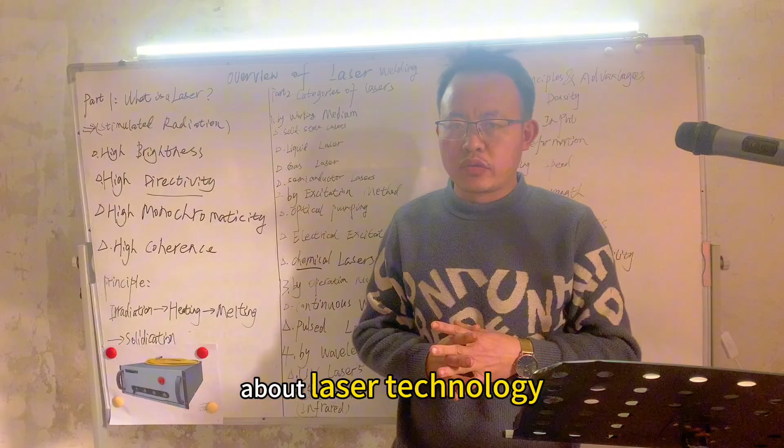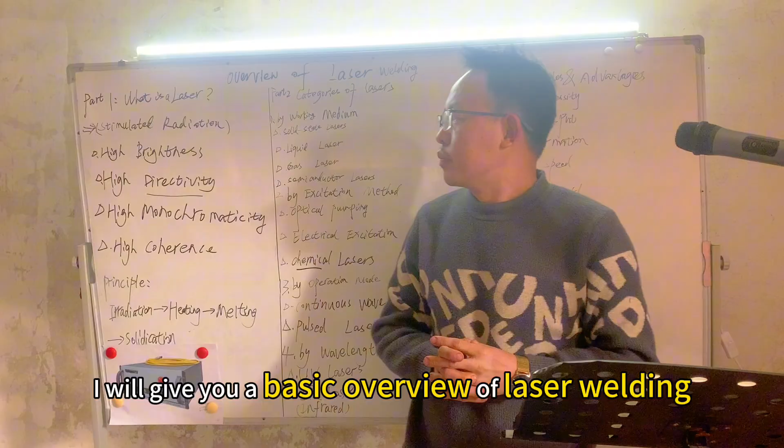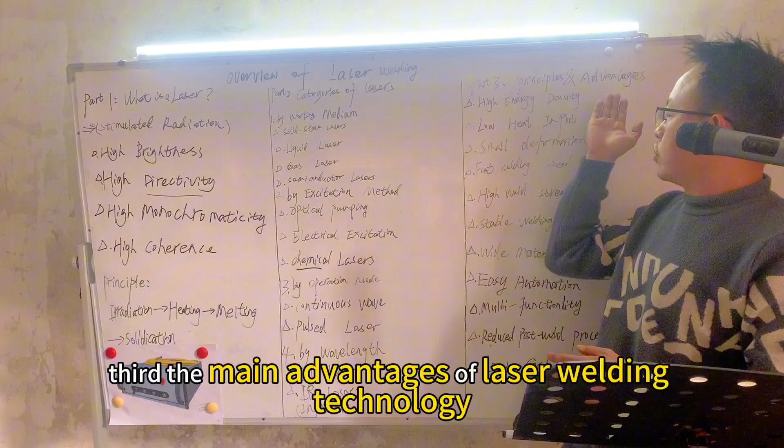Today, we are going to talk about laser welding, which is an important technology in modern manufacturing. In this video, I will give you a basic overview of laser welding. We will cover three main topics. First, what a laser is. Second, the basic principle of laser welding. Third, the main advantages of laser welding technology. I will also write some keywords on the whiteboard so that it is easier to follow.

Alright, let's begin. Number 1. What is a laser? First, let's talk about what a laser is. A laser is a kind of coherent light generated by stimulated emission of radiation. Compared with ordinary light, laser light has several special properties. There are 4 important characteristics. The first is high brightness. Laser light concentrates a very large amount of energy into a very small spot.

The second is high directivity. This means the laser beam travels in a very straight and focused direction. The third is high monochromaticity. This means the laser light has almost a single wavelength. The fourth characteristic is high coherence. In other words, the light waves move together in the same phase.

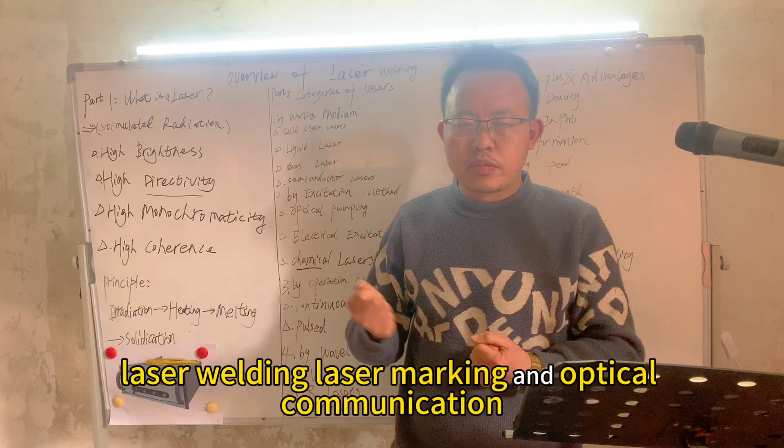Because of these properties, the energy density of a laser beam can reach more than 10 million watts per square centimeter. This extremely high energy density allows lasers to be widely used in many fields such as laser cutting, laser welding, laser marking, and optical communication. A laser device is a machine that generates and amplifies this laser beam. Lasers can also be classified in several ways, for example by working medium, excitation method, operation mode, and wavelength.

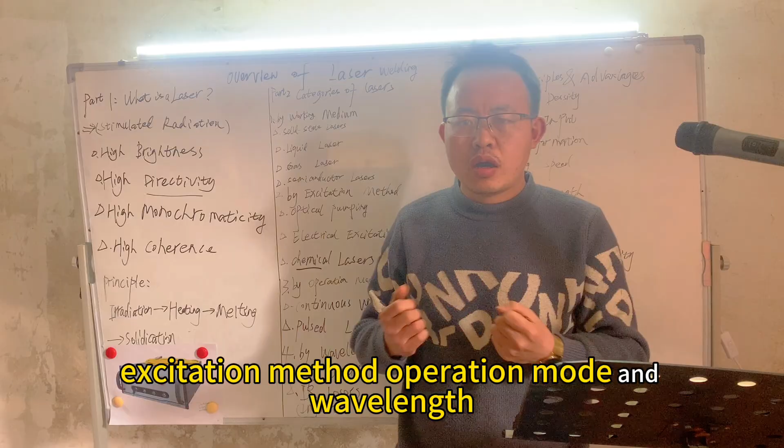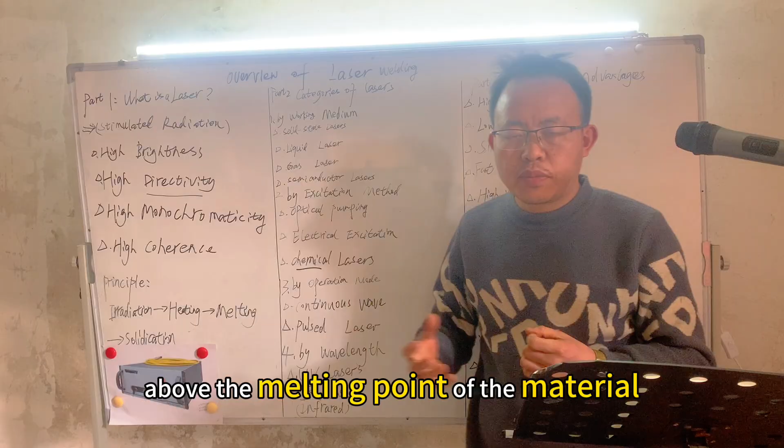Now, number 3, basic principle of laser welding. Now let's look at the basic principle of laser welding. Laser welding is a material joining process that uses a high-energy laser beam as the heat source. When the laser beam is focused onto the surface of the workpiece, the material absorbs the laser energy and heats up rapidly. The temperature quickly rises above the melting point of the material, forming a small molten pool.

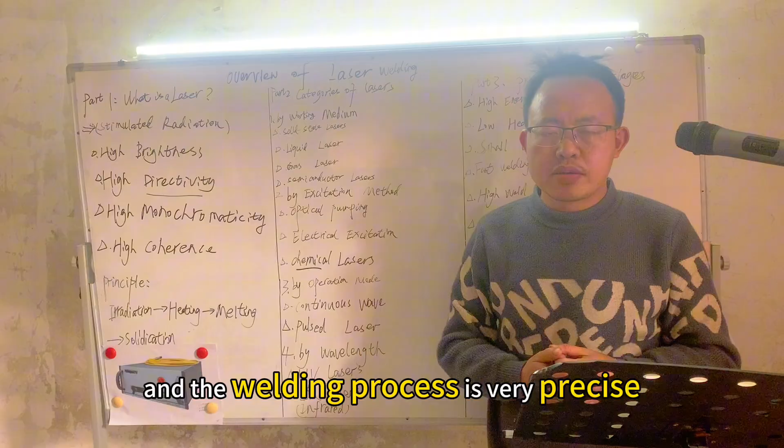As the laser beam moves forward, the molten metal solidifies and forms a weld seam, which joins the materials together. Because the laser beam is highly concentrated, the heating area is very small and the welding process is very precise. Today, laser welding technology is widely used in many industries, such as automobile manufacturing, rail transportation, aerospace, shipbuilding, petrochemical industry, and modern equipment manufacturing.

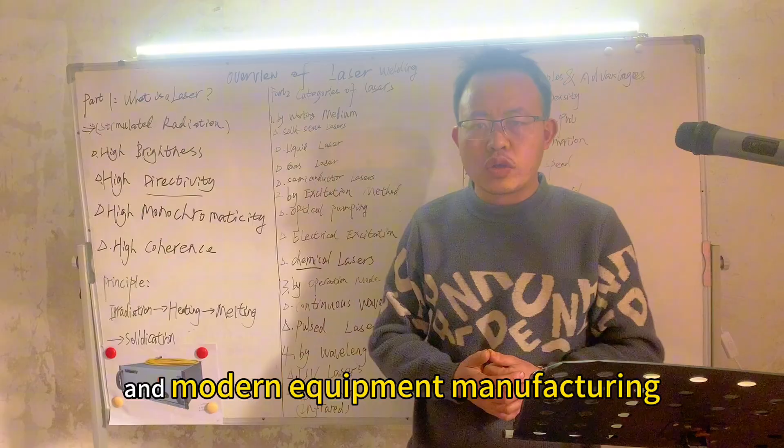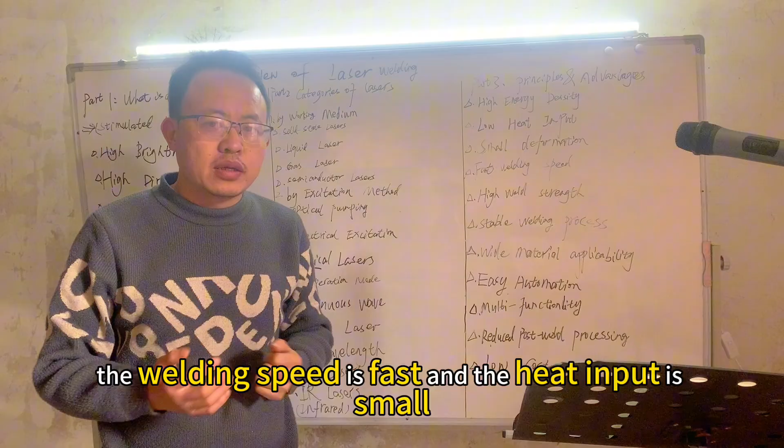Number 4, advantages of laser welding. Now let's talk about the advantages of laser welding. Laser welding has developed very quickly in recent years because it offers many unique benefits. Here are 11 key advantages. Advantage 1, high energy density. Laser welding has very high energy density and strong penetration ability. The welding speed is fast and the heat input is small. Therefore, the heat affected zone is small and the deformation of the workpiece is minimal.

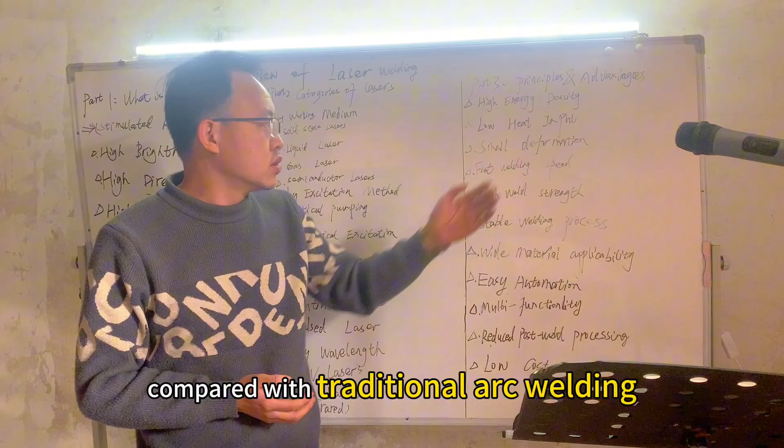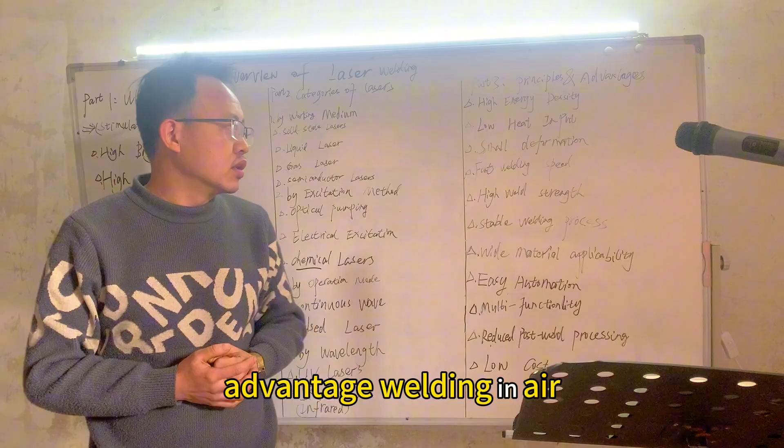Advantage 2. Stable welding process. Compared with traditional arc welding, the laser beam is very stable. The welding parameters are easier to control, which results in good repeatability and consistent weld quality. Advantage 3. Welding in air. Unlike electron beam welding, laser welding does not require a vacuum environment. It can be performed directly in air and is not affected by electromagnetic interference. This makes the process simpler and more practical for industrial production.

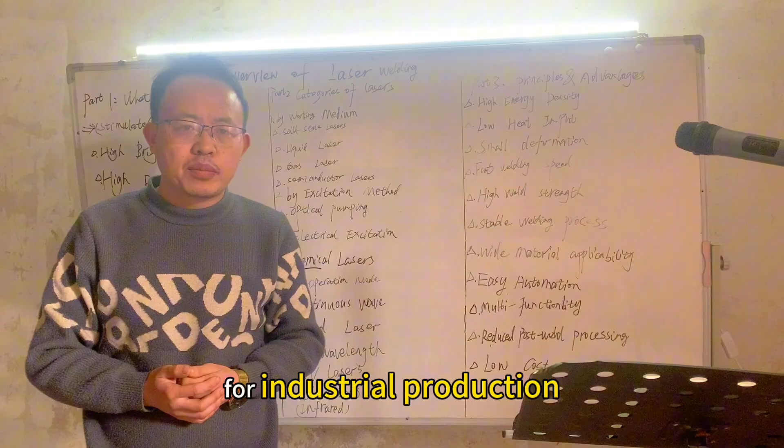Advantage 4. High welding quality. Laser weld seams are usually narrow and clean, with good surface quality. In many cases, the strength of the weld seam can even be higher than the base material. Advantage 5. High efficiency and low noise. Laser welding is usually much faster than traditional welding methods. It also produces very little noise, which improves the working environment.

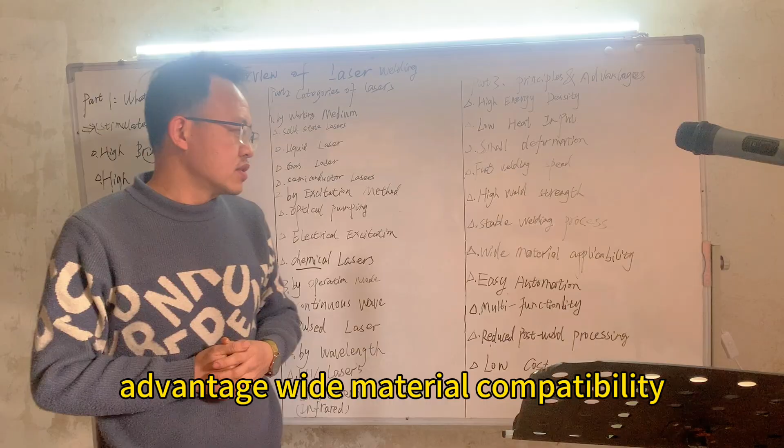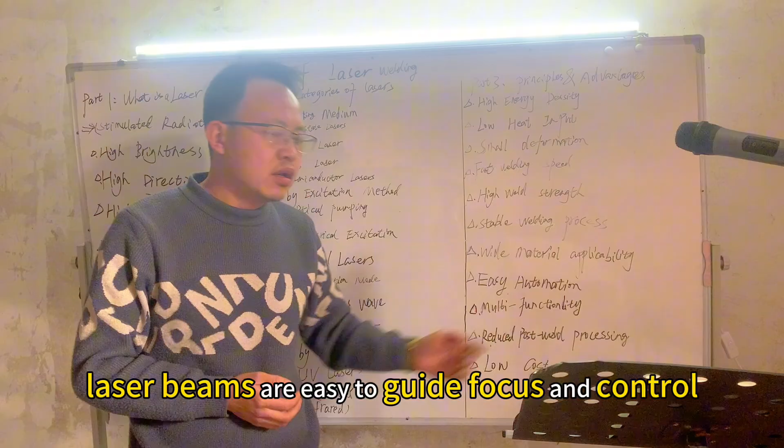Advantage 6. Wide material compatibility. Laser welding can join not only metals, but also engineering plastics and some special materials. It can even weld dissimilar materials or materials with very high melting points. Advantage 7. Easy automation. Laser beams are easy to guide, focus, and control. Therefore, laser welding can easily be integrated with robots, computers, and CNC machines, making it ideal for automated production lines.

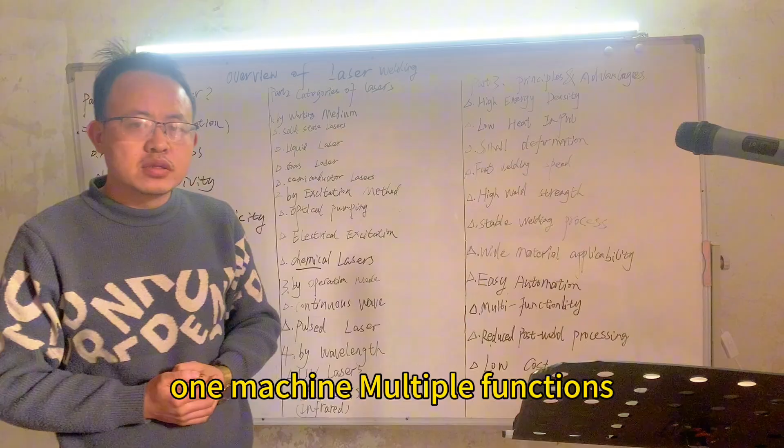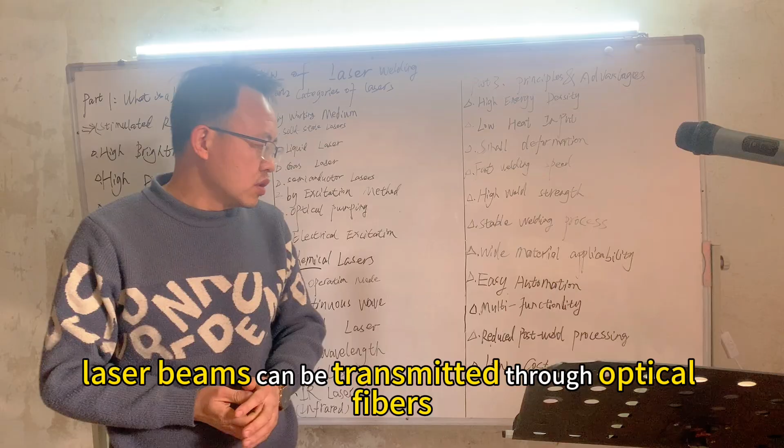Advantage 8. One machine, multiple functions. Through beam splitting or beam switching technology, one laser system can perform multiple processes, such as welding, drilling, and cutting. This improves the overall efficiency of the equipment. Advantage 9, flexible welding positions. Laser beams can be transmitted through optical fibers and lenses. This allows welding in hard-to-reach areas or complex structures. It is especially useful for precision components and small parts.

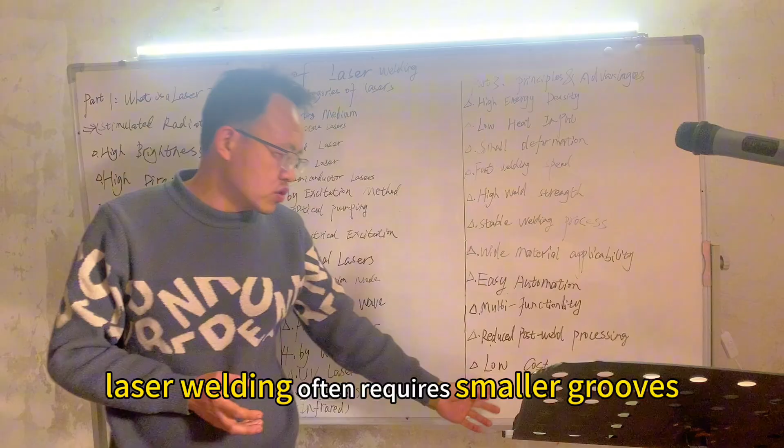Advantage 10, weld purification effect. During laser welding, some harmful impurities such as phosphorus and sulfur can vaporize. This process helps purify the weld seam and improves the overall strength of the joint. Advantage 11, lower manufacturing cost. Laser welding often requires smaller grooves and less filler material. Because the process is fast and highly efficient, it can reduce overall production costs in many manufacturing applications.

5. Conclusion. To summarize, laser welding is a high-precision, high-efficiency, and highly controllable welding technology. Because of its many advantages, it has become an important manufacturing method in modern industry.